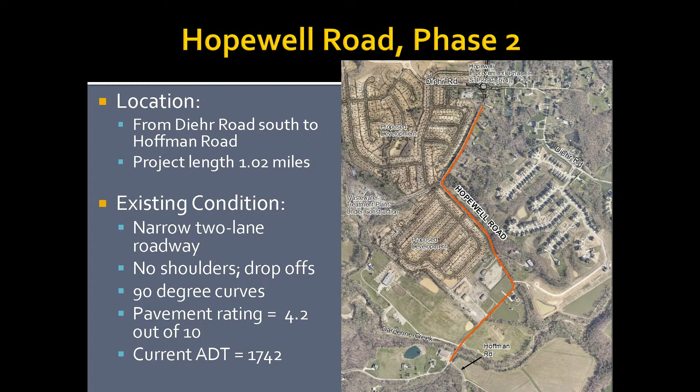We just got a picture for you, just a general idea of what's out there again. What you see is trees close to the roadway, ditches, and narrow pavement. And then we have the 90-degree turns out there that'll also need to be smoothed. What we're looking at doing on this project is keeping it as a 2-lane roadway, adding curb and gutter, and then on the west side of the road we have a 10-foot wide shared use path for bicycles and pedestrians.

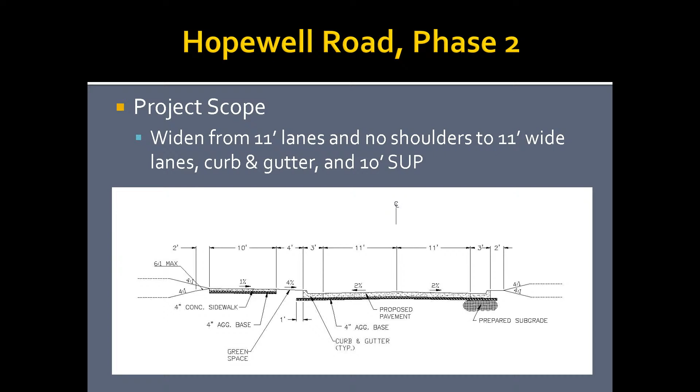And dollar-wise, this one is what has been submitted for federal funds. I actually believe that we had to ask for construction funds in 2028, but it's a project that shouldn't hopefully be that complicated and could be accelerated. So we have $375,000 for design, and then we went with an 80-20 match with the federal money. Everything in the other column is the federal request. Now those are not approved right now. We'll get a tentative list in May, and it'll be more official in August as to whether or not this is a funded project.

If I had to guess, I think it will be funded because it's a good preservation project with a poor pavement score. And basically we're looking at a $5.73 million project, of which 1.294 million would come from the road board. And that is our one, kind of let's say, traditional road widening project.

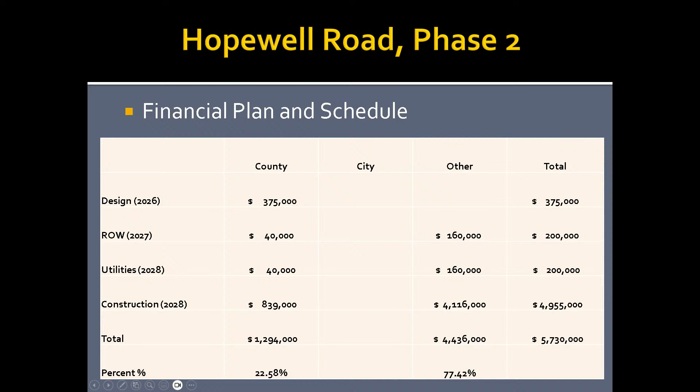Moving on, our next project is a realignment of Hueffmeier and Benne Road. We came with the Benne Road project a couple years ago because it has a really unconventional intersection right with Hueffmeier and Route D. In addition, there's also two 90-degree turns on Benne Road. However, we just recently found out there's a large lot subdivision planned in the area, and we think there's an opportunity to actually extend Benne Road to the west into Hueffmeier Road, and then realign Hueffmeier Road to a better location on Route D where there's better sight distance.

The current intersection at Benne and D has a bit of a hill there which can block the sight distance, so we're looking at moving Hueffmeier to the west and extending Benne Road, which takes care of both of the 90-degree turns on Benne Road and cleans up the intersection.

So this is just a look at that's Hueffmeier coming in on the right, and then Route D is where the stop sign is in the distance there. And this is just an example of one of the 90-degree turns on Benne Road. There's been a number of crashes over the years, just run-off-the-road type sliding through curves, those sorts of incidents.

Dollar-wise, the roads are not eligible for federal funds. This would have to be an all-road board participation project.

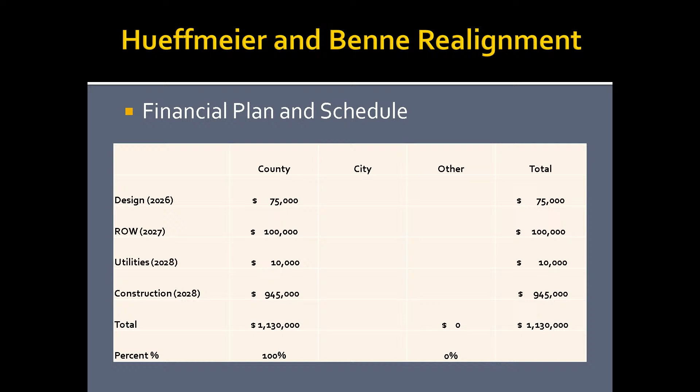Okay, moving on, we have another curve project for you here. This one's at the far limits of St. Charles County, on Route T. What we have here is a situation where Sneak Road intersects with Route T at a really, really poor location. There's a hill that blocks sight of the intersection.

This project was actually brought to us by the resident who owns the property on the south side of the road. You can see by the barn closest to the road, there's a pathway, a driveway if you will, from his house or property close to Mile Lane that snakes through and up to Sneak Road. He says a lot of people drive on that, even though it's his private property, because they know the intersection is so bad that they'll cut through his property to come out closer to the top of the hill by Mile Lane.

So this project looks to move that intersection to the south. He said he was willing to participate with us just to get the intersection moved to try and make this happen. I would say that is a bad intersection.

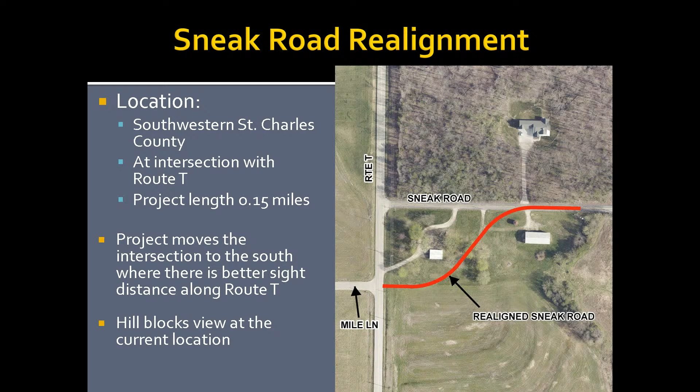I live off of Sneak Road. Oh, okay. And we'll actually take D to T just to bypass this intersection, especially if you're pulling a trailer. That's what I've heard, there's a lot of trailers out there too.

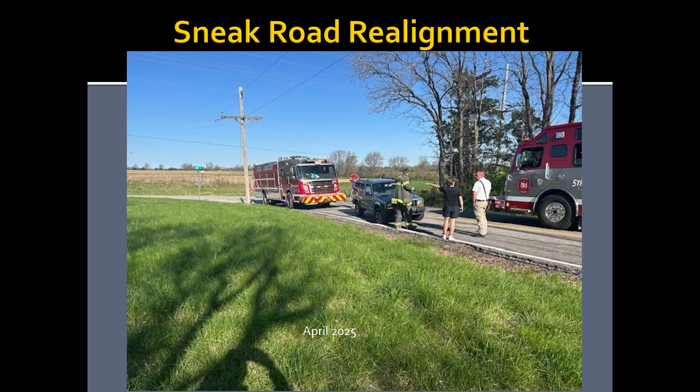This gentleman also sent us a couple pictures recently. This one's from April, there was an incident. You can just see the way the hill hides the view. And he sent us one actually from this week where a kid said he was coming up over the hill and there was a dump truck, and he had to dive off into the ditch to avoid hitting the truck. And T's 55, which is what they should be driving anyway, right? So that doesn't help either.

So grand total on this one, this is a project we can probably design in-house right away, maybe little to no cost, and then it's just construction of making that connection. So we're looking at a $600,000 project. Not a huge ask, I realize that's still obviously several hundred thousand dollars, but something that could really make a difference out there. And again, Sneak Road's not functionally classified, it's a lower volume road, so it's not a project that's eligible for federal funding, unfortunately.

Okay, I've got two more for you here. The next one is a project we're submitting for federal funds on for congestion mitigation funds. This would be putting a roundabout at the intersection of Towers Road and Caulks Hill Road. Both of these are minor arterial roadways. We did counts out there, and we have over 550 vehicles in the peak hour, I believe that was the PM, but the AM is a similar situation.

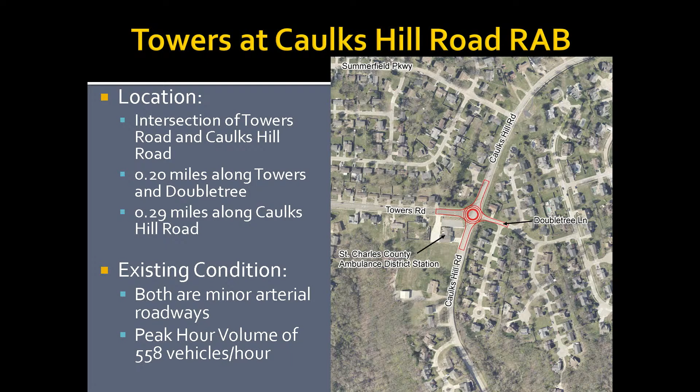The primary movement is coming south down Caulks Hill and turning onto Towers, or the opposite, particularly in the morning, eastbound on Towers turning north onto Caulks Hill. So this would be the elimination of a four-way stop with a roundabout. This just shows you here, the line of cars in the morning of everybody wanting to turn onto Caulks Hill.

And again, we have submitted this one for federal funds. We went with it as a complete 80-20. We usually don't ask for design work to be federally funded because we like to get things started sooner, but in this case we wanted to maximize the federal request. So basically we're looking at $552,000 total from the road board, and then $2,208,000 would hopefully be federal funds if it is approved. It has been submitted, so like the other, we're waiting to find out if it'll be funded or not.

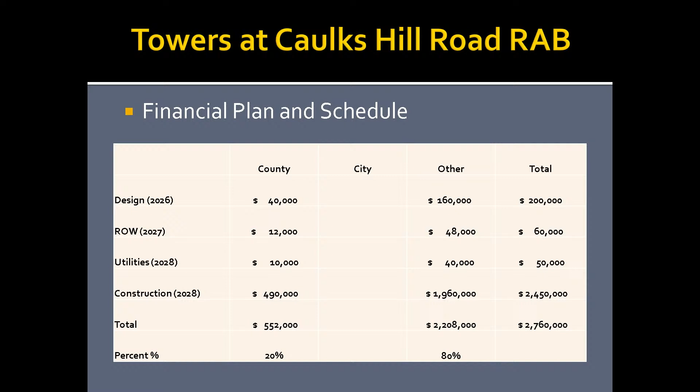And lastly is a sidewalk on Hepperman Road. The north part here, this section from Interstate Drive down to Golf Club Drive, was rebuilt several years ago, before we were doing a lot of sidewalk work. So we had graded a path on a flat space on the west side of the road, but never actually put in the sidewalk. Now that we're continuing the work down Hepperman Road the rest of the way, that project is being set up so there would be a path on the west side of Hepperman, and this will fill in the gap.

There's obviously sidewalks along Interstate Drive and will be on the south end of Hepperman, so we're just trying to complete that gap. Timing wise, this will probably be later, just because Hepperman's about to go into right-of-way acquisition, so it should be under construction next year, and I don't think we'd have this done that quick.

If it was just a simple sidewalk paving, that would help, but part of the issue is as you get to Peruque Creek, there's a bridge, and the bridge isn't wide enough to put pedestrians on it, so we'd actually need a separate pedestrian bridge over the creek next to it. That's going to drive a lot of the cost on this project.

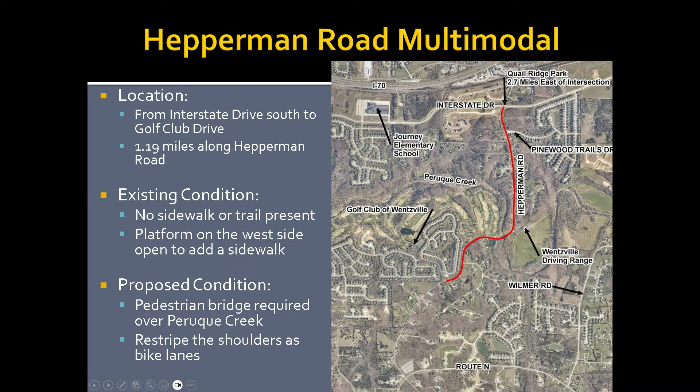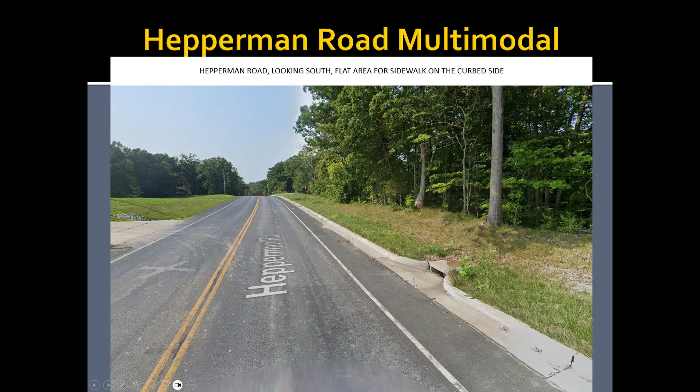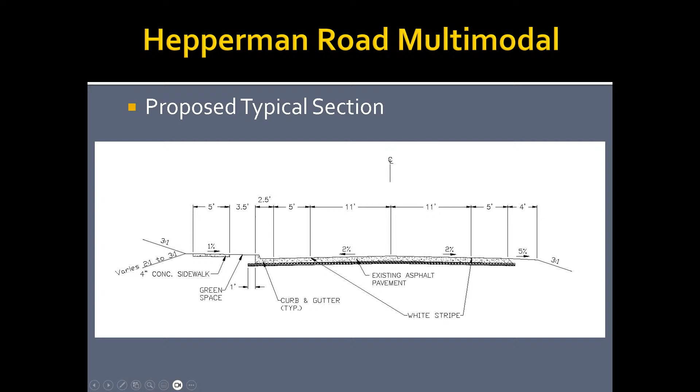Again, just to look at the typical section, the pavement's already there, so it's just adding the sidewalk on the flat space. And lastly, price.

This we went close to 80-20 on right-of-way, utilities, and construction. There's really minimal right-of-way required—a lot of that was already acquired by the road project that was built several years ago.

So we'd have some design cost, and again, the biggest driver in the construction would be the pedestrian bridge. We're about 70% federal, 30% road board would be the request on this one. So $565,000 out of a $1.84 million project.

And that is my 5 projects, if you have any questions.

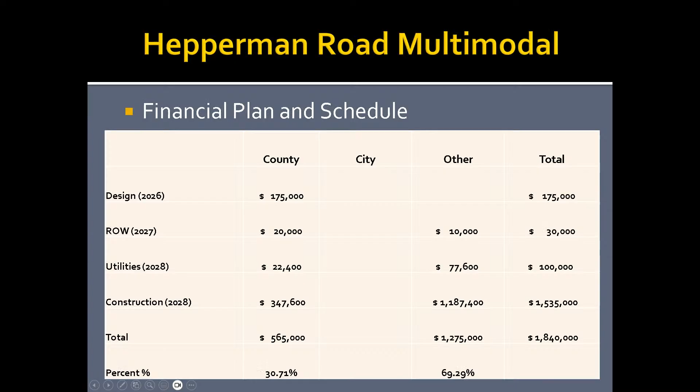The old road, yes, we're looking at it. It looks like there's only one, maybe two entrances on Benny Road, so the majority of the pavement can go away through that section—it can just be vacated. Part of it might have to stay in as a driveway, but no, most of the access is not dependent on it.

There's a triangular piece south of Benny Road between D that accesses off of D and some of the other parcels—it's all the same ownership. So we're thinking that a lot of Benny Road would just be vacated completely, and the same would happen with Huffmeyer south of the new Benny connection.

Anything else? Thanks, Chris. All right.

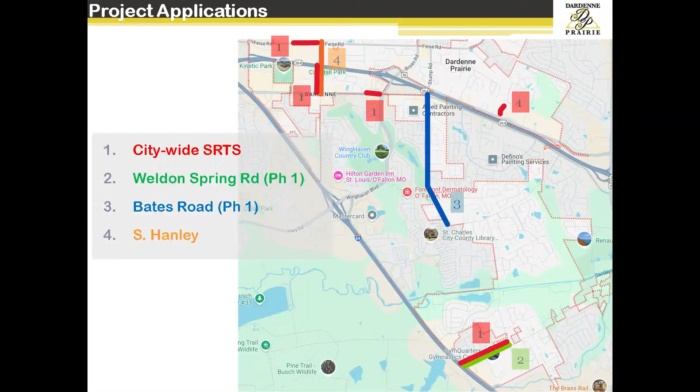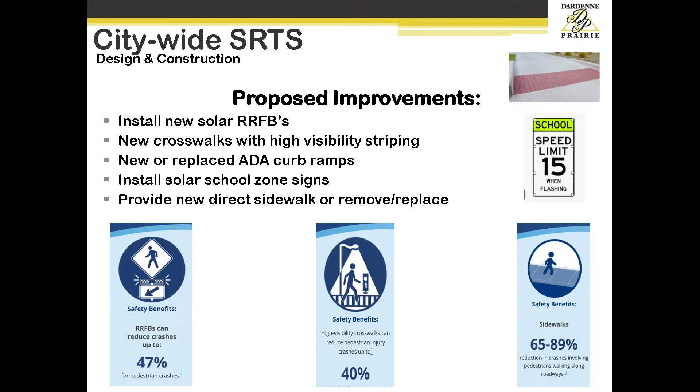Some highlights of what we're doing at each of the schools: new crosswalks, ADA ramps, rectangular rapid flashing beacons with high visibility countermeasures, and school zone flashing signs at every location.

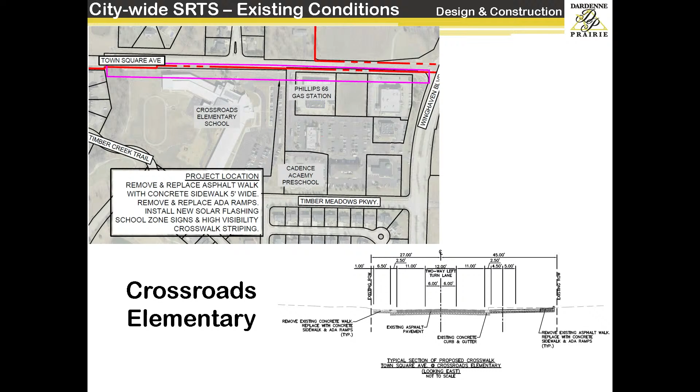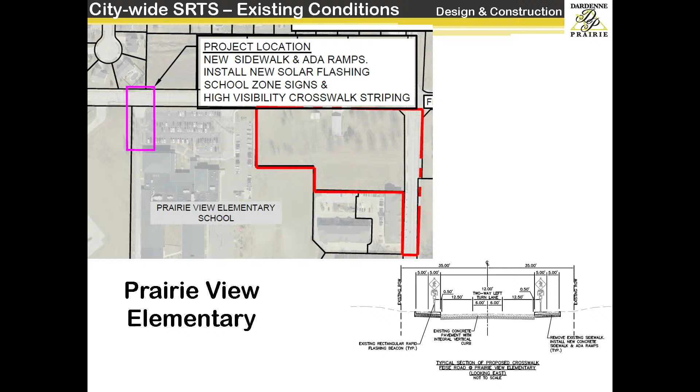This is the first one, Crossroads, the sidewalk area in disrepair that I discussed, with a typical section shown. Prairie View has that isolated entrance area that needs help with the conflicts, plus solar flashing school zone and high visibility crosswalks, since a lot of kids walk to this school.

Similar to Ostmann - conflicts, rapid flashing beacons - we're going to use the flashing school zone.

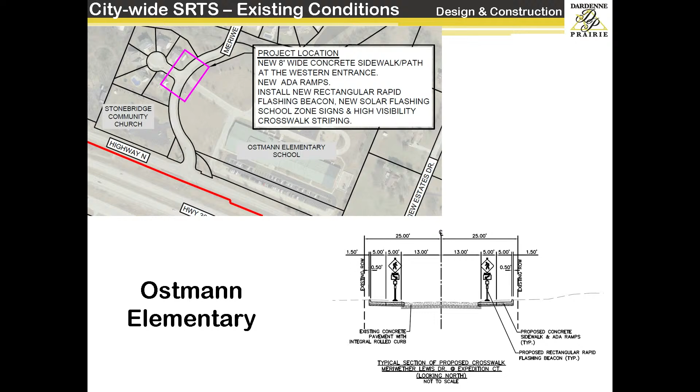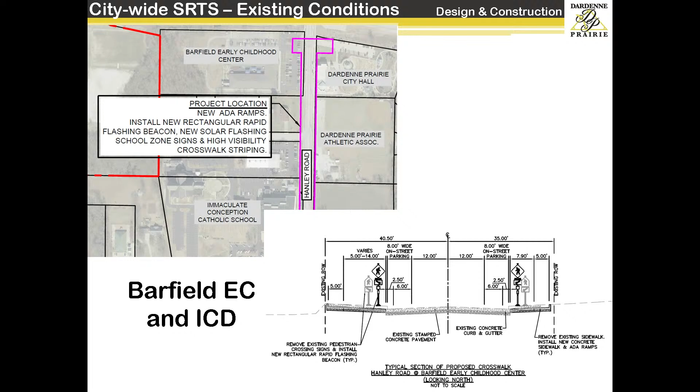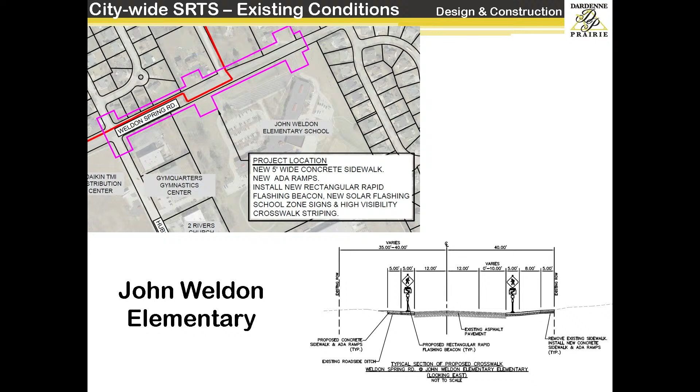John Weldon has similar problems along Weldon Spring Road. We're planning rapid flashing beacons to help, since a lot of kids are crossing from these neighborhoods on a very busy road that doesn't have a lot of warnings for crossing pedestrians.

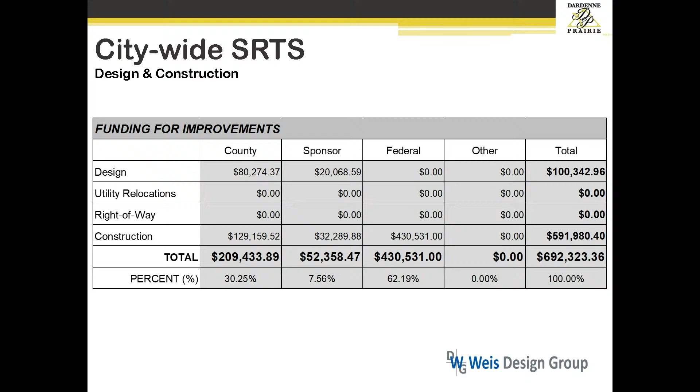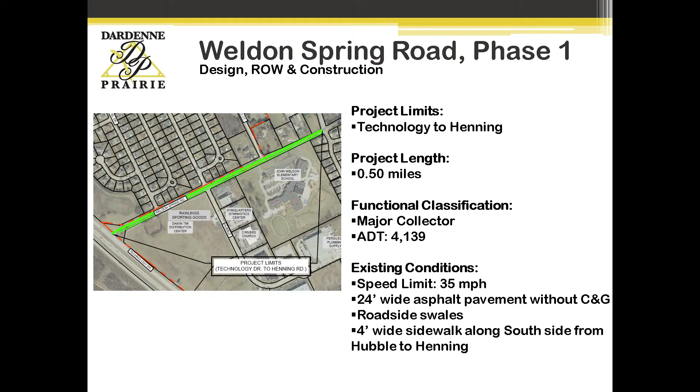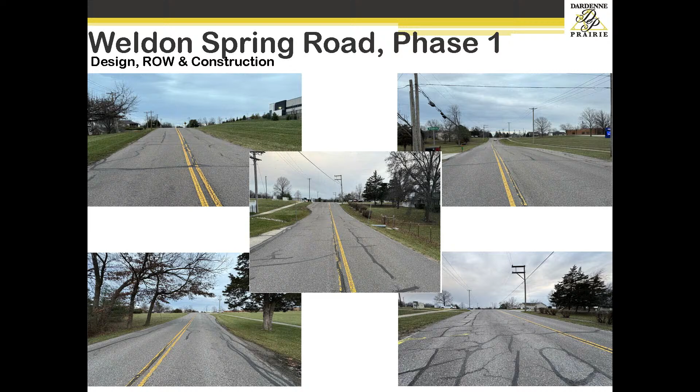Again, road improvements, new curb and gutter, sewers, sidewalk on part but also a side path. This is existing conditions - the pavement's not great either - but the big thing is to give it a shared use path, new curb and gutter, rectangular rapid beacons, raised crossings, and a bit of alignment at the Weldon Spring and Technology intersection.

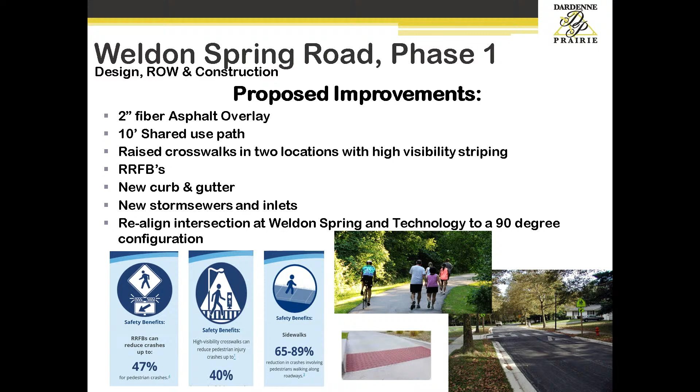This has been endorsed by MoDOT because we are touching MoDOT territory out there at Technology Drive. We do have a letter of support from them, and there's our typical section showing the shared use path.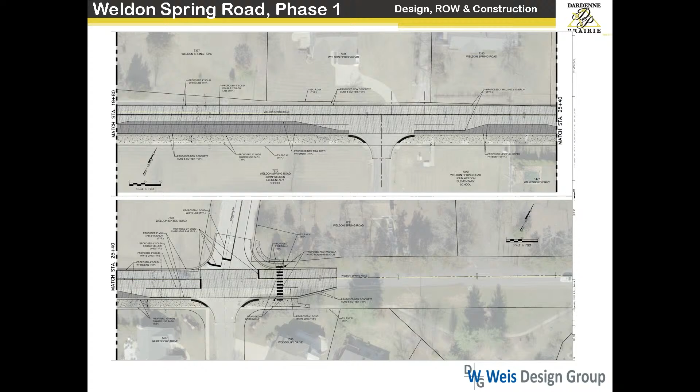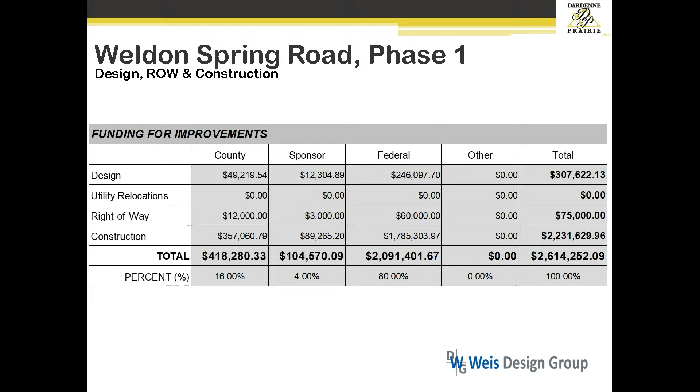This next phase will be even more difficult and challenging, Phase 2, but we're hoping to set the table for that with Phase 1. We are asking for a high amount of federal share to the tune, as you can see here. There's our breakdown.

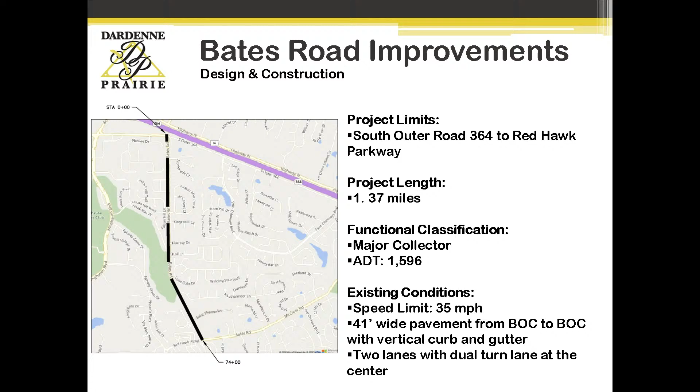Bates is a lot simpler project. It's basically preservation, pavement preservation, but it does have pavement deterioration, existing conditions. It's time to do something with Bates Road before it gets too bad.

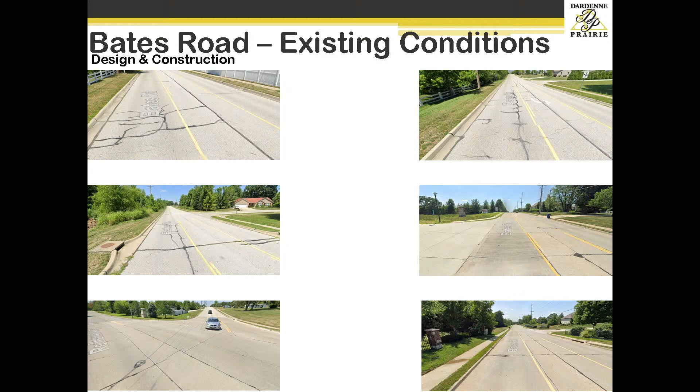Similar, we're upgrading all the pedestrian and bicycle movements, high visibility crosswalks where they exist, and the rapid flashing beacons, again, to improve those countermeasures. When you go into doing design work and pre-design work, some of these countermeasures give you percentages of pedestrian safety increases in how it reduces the different crashes and conflicts. This is all part of the FHWA program, and why you would select that and what your reductions are expected.

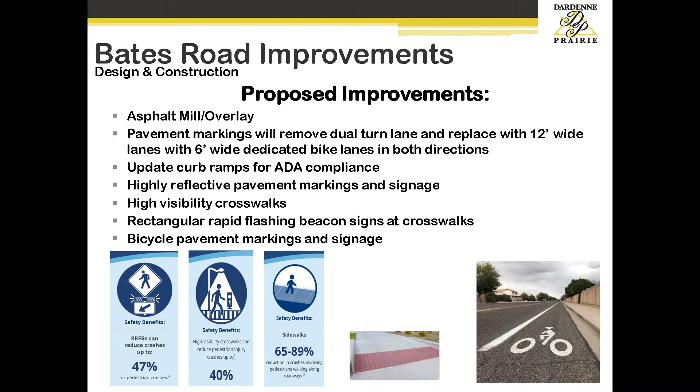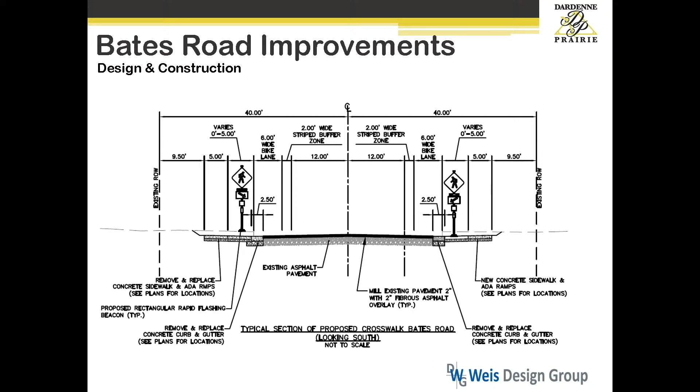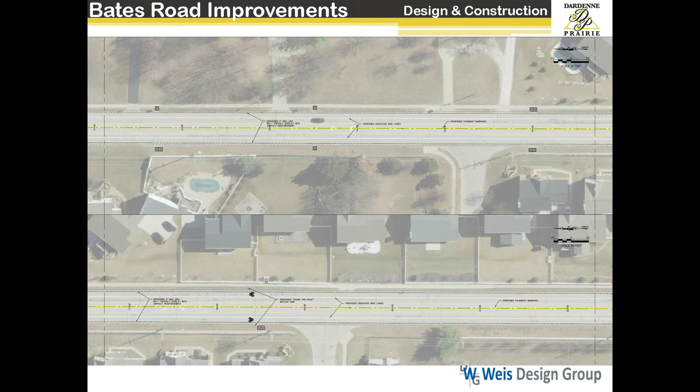Typical section, again, we're not changing the cross section, we're improving what we have in striping, bike lanes, rapid flashing beacons. And here's a preliminary view showing the markings and the pavement markings and the different crosswalks.

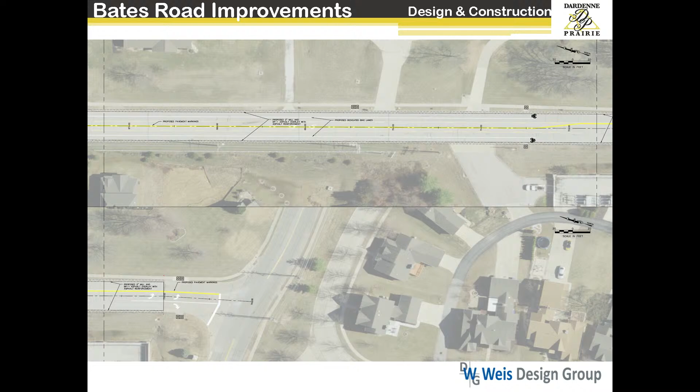This will be a phase 2, because Bates Road down here turns and heads towards McClure. We had previously asked for this project together, but we decided to separate it for funding purposes. We were in phase 1 here, and then we'll reapply for phase 2 next year. Hopes that we get phase 1.

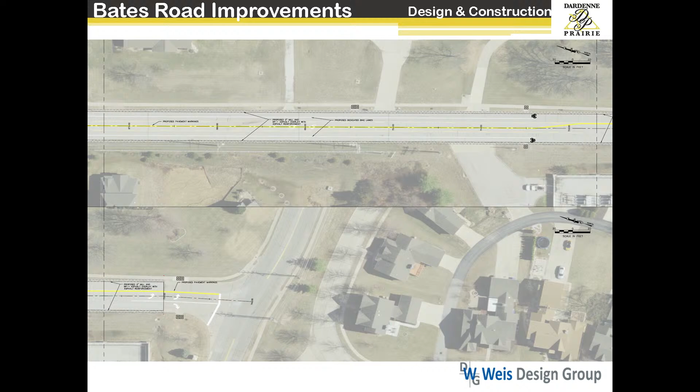The funding breakdown, we are asking for federal money to the tune of $836,000. There's our breakdown.

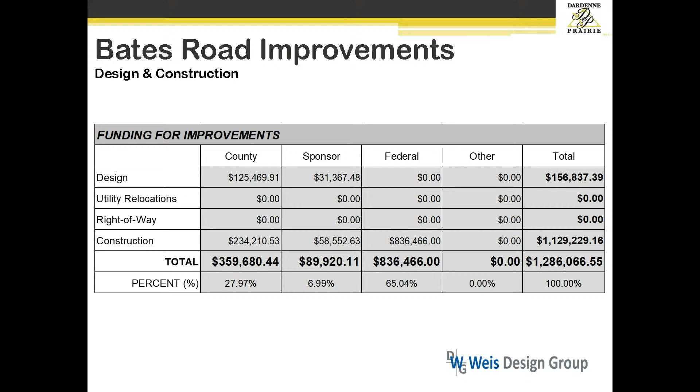South Hanley. South Hanley renovation. On this project, the city has already previously approved design funds by the road board. This is an ask for construction implementation only.

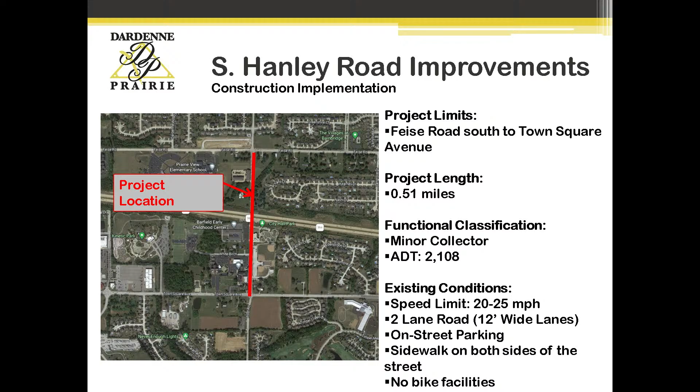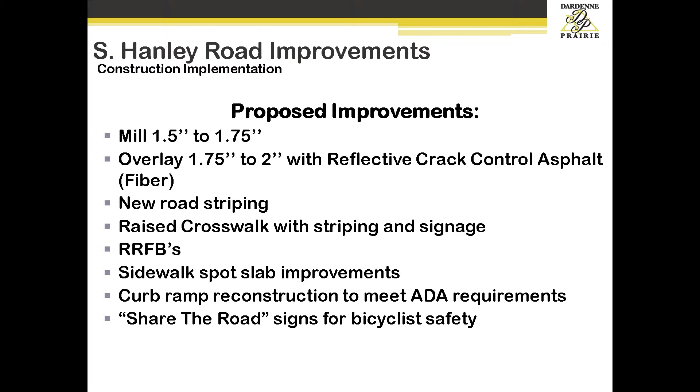And raised crosswalks, we're going to have a lot of visibility here. This is a very highly pedestrian movement area, with the city park, city hall, two schools, rapid flashing beacons, crosswalks.

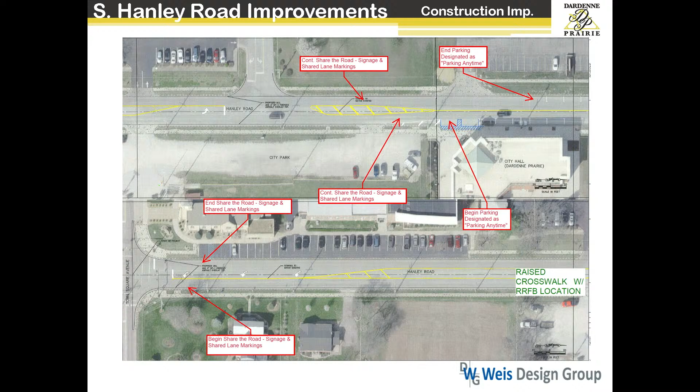We've had extensive meetings with Sarah and Amanda on this project as well, and we share with you some of those comments that we've worked through together about how we can do this project.

And still, one of the keys to this, City Hall being here and City Park over here, there's on-street parking, parallel parking, but we can't just lose that. So we're going to be doing some things that will say things like event parking only, because we want to be able to put in some bike lanes here. And so all these comments are in conjunction with Sarah and Amanda, and we think it's a great plan if we can get the funding.

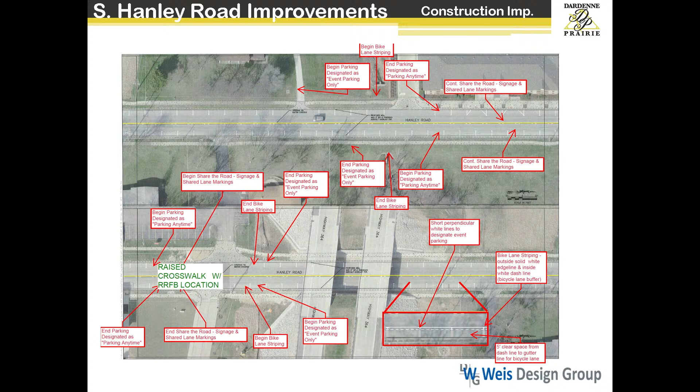Questions? What's going to happen if you don't get federal money? If we don't get federal money on this project, all of them? Let's say, I know you'll get some probably, but what? Well, it's likely that they will be tabled. Most of them, now this one, maybe not, because we would hope maybe the county road board could fit that into theirs, because it's not as big of a burden on the road board. But Weldon Spring, I don't see how we could do that without federal money.

We have re-asked for the money on Bates, so this is our second go-through. We did break it out so we would have less ask. We try to listen to what we're hearing, and we've met with East West Gateway on these projects and talked to them about how we improve our status in the points. But the bigger ones, Weldon Spring and those, probably would not be started without the commitment from federal money, because they're pretty good sized projects.

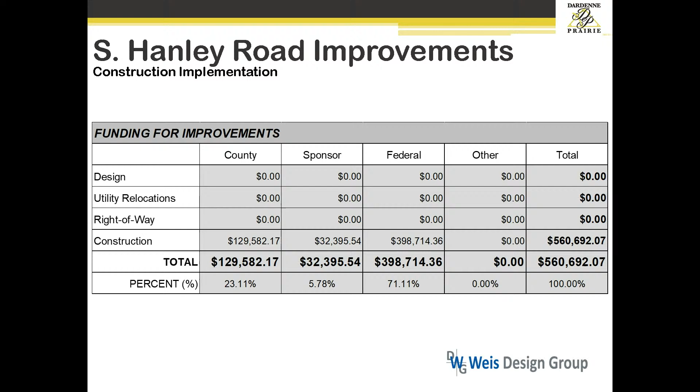because we have the folks here from Flint Hill as well, and this is their first time on the ask, I believe. We did have a small ask and did receive part of the start of the intersection of Mexico and Highway P, and we're in design phase on that project.

So this project would be... it's showing on my screen, but, oh, there it goes. Yeah, little bit of lag, I gotta hit it.

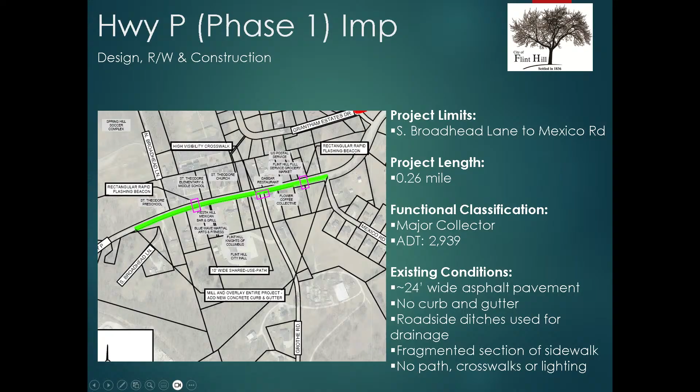And that is in our submittal to East West Gateway and to the County Road Board. Existing conditions: part of the church and school, the restaurant, City Hall over here, and right here is the parking lot for the Flint Hill Market.

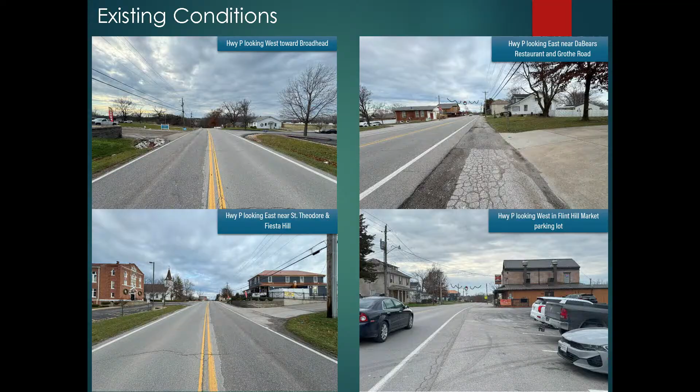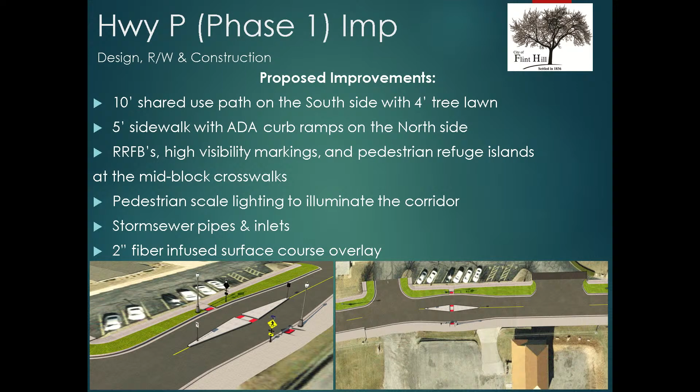And because the pavement is not terrible yet, but because we're doing new curb and gutter and improving all this, we're only going to put, through our project area, a 2-inch lift on it. So we're not proposing to rebuild completely Highway P. We're going to use what pavement we have and just put, from our project limits, an overlay.

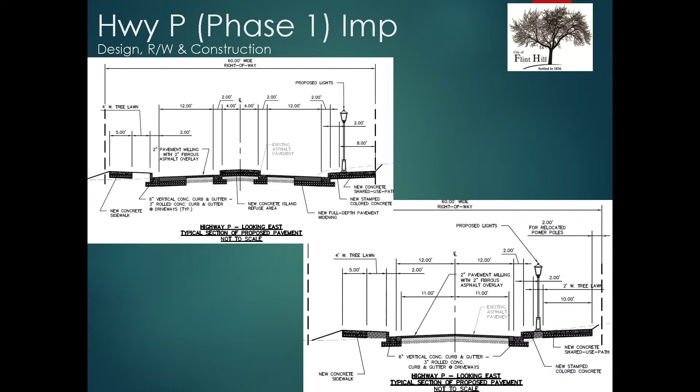There's some sections: shared use path as I discussed, and then sidewalk on this side with these refuge medians. There's one there, another one down towards, and then there's 3 total of those crossings, and then there's the pavement limits. You can see the shared use path through here - this is a little difficult because near the Flint Hill Market, the pavement kind of drops off, so we're going to have to do some creative things there with that side of the road.

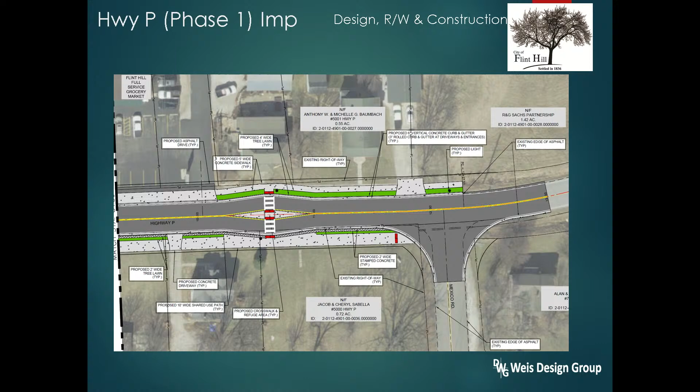We are asking for a large share of federal money, $1.5 million. Surprisingly, it's an expensive short stretch, but there's a lot going on with the safety improvements, median crossings, new curb and gutter. We have to put storm sewer in order to build that, because right now you can't just put a sidewalk on top of a roadside ditch. There's a lot of things going on in this short distance.